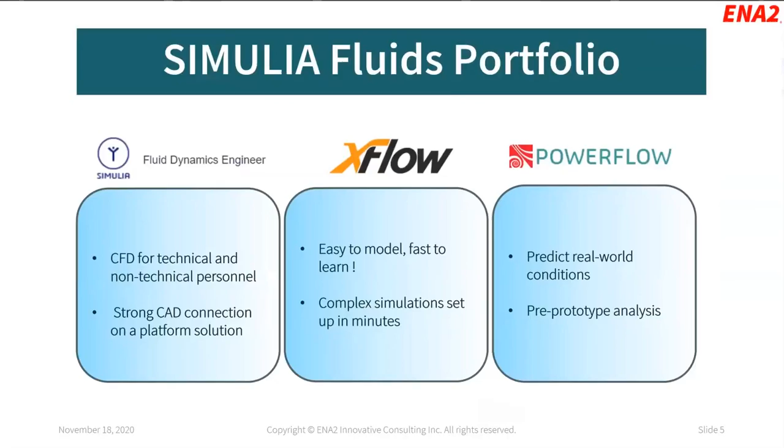All right, so let's start with FMK. FMK is a very easy-to-use solution available on the platform, and it has the mentioned CAD embedded CFD. So if you do make any changes in the CAD, it automatically gets transferred downstream of the process in your simulation study setup as well.

This reduces the amount of errors that, say for example, a non-expert could potentially commit, and really makes it very adaptable for designers, letting them perform simulations easily, effectively, and efficiently.

In support of the fact that we use a platform, it lets you quickly iterate through designs, something in the order of 1,000. So it really helps you figure out a very good starting point for your product design, and it supports the early stage design development process.

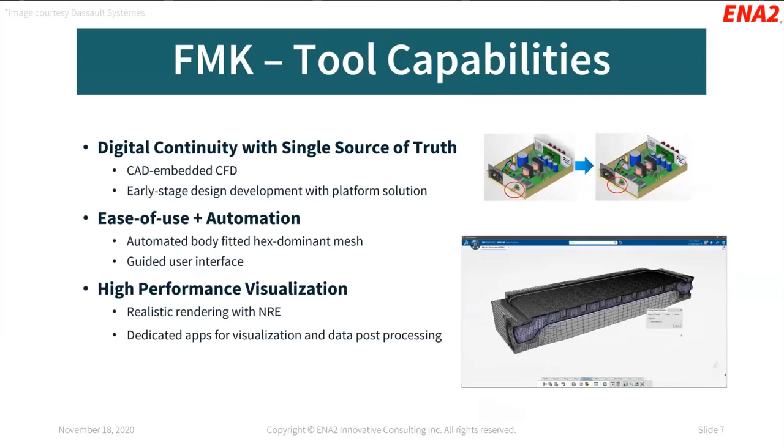It's definitely very easy to use, and it's highly automated in the way the solver and the solution are structured. We have automated body-fitted hex-dominant meshes available, and a guided user interface that helps a non-expert prepare the simulation the right way, giving them warnings and errors to make sure the simulation is prepared correctly even before submitting or running it. This gives confidence when presenting results to experts or upper management in the product design process.

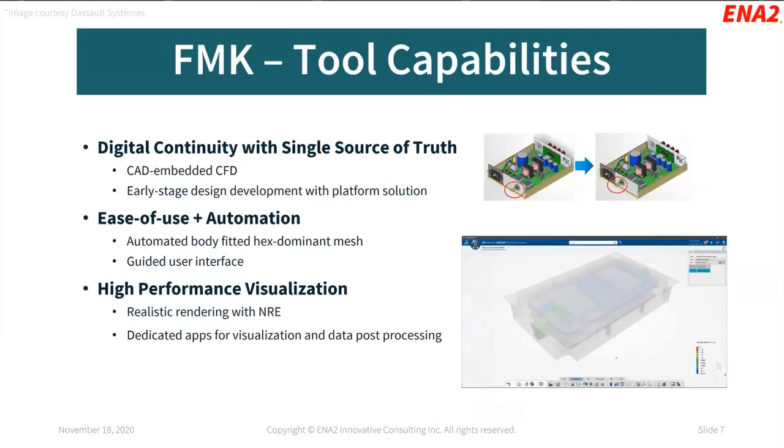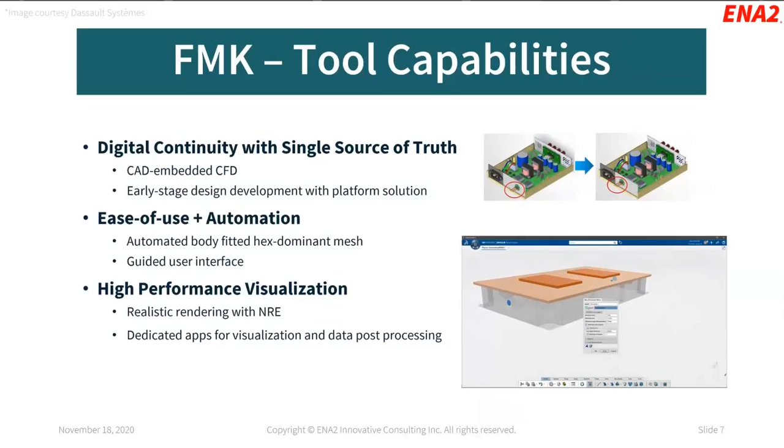It's also got some really new features added, which is high performance visualization. We now have realistic rendering capabilities available in FMK as a result of the NRE, our new rendering engine. FMK is a solution that gives you access to not just one application but multiple applications used for visualization and data post-processing — 2D and 3D streamlines, vector plots, contour plots, and things like that can be very quickly prepared and presented to upper management.

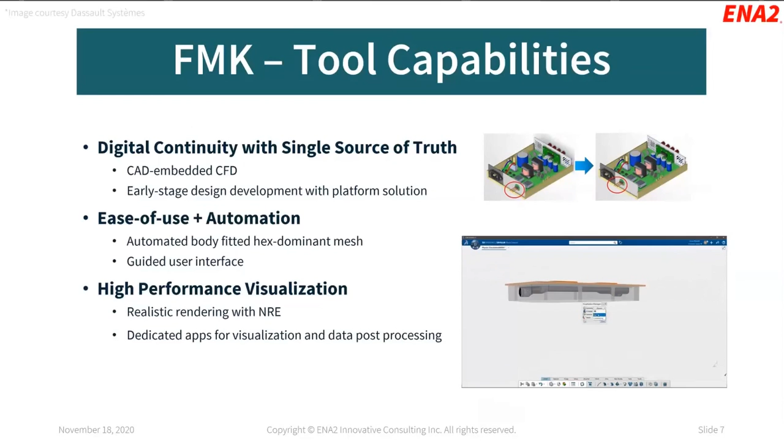As an ending note, you can see that really awesome video where FMK is being implemented in the design of, I believe, a component that goes into the high-tech industry, showing how he changes his mesh, evaluates his results, and really makes good use of the tool.

Moving on to the solver capabilities, FMK is definitely a competitive solver compared to the solvers available in the market. We have turbulence modeling that's quite standard and effective, including our very well-known eddy viscosity-based turbulence models, and our hybrid wall function approach that lets you prepare meshes that are computationally more efficient.

FMK is definitely very strong in addressing multi-physics simulation, which is really picking up in the market today. We have FSI, fluid structure interaction, where a cool feature is that it automatically detects the interfaces between solids and fluids, so the user doesn't have to go through any particular connection or conformal mapping process. We also have CHT, conjugate heat transfer models with supported radiation, which is also in demand in the market today.

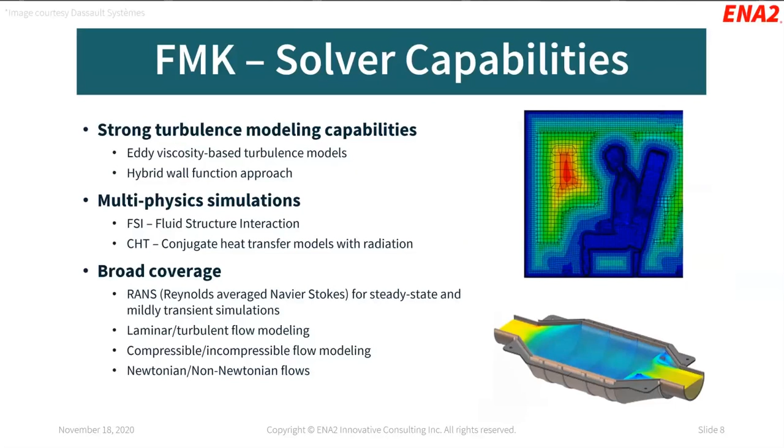As far as physics coverage is concerned, we have our very well-established RANS, Reynolds Averaged Navier-Stokes solver, that FMK uses predominantly for steady state and mildly transient simulations. Its coverage is pretty standard for any CFD tool in the market — laminar and turbulent flow modeling, compressible and incompressible flow modeling. But I think a winning point for FMK is its capability of modeling non-Newtonian flows, which is rather difficult and has strong application in the medical devices industry.

We have a lot of applications for FMK across 12 industries in total, but I've taken the liberty of putting up some applications for 3 of them. We'll start with the automotive industry, transportation and mobility basically.

Here, the kind of simulations where FMK is very useful focus on getting quick simulation results without compromising on accuracy, so we don't want to spend a lot of time preparing the geometry or mesh. Typical scenarios include equipment that goes into automotive systems, like air induction or cold flow intake systems, where you're trying to understand the performance of the component — pressure distribution, velocity distribution, and maybe thermal distribution. The same holds for exhaust manifolds and muffler systems.

Since FMK can work with non-Newtonian fluids, it has a strong application in the life sciences industry, where blood flow modeling can be done for organs and medical devices.

Lastly, looking into the high-tech industry, because it's multi-physics in nature, we can address some really cool applications like electronic cooling — for example, if you're interested in understanding a specific device's thermal or flow performance in an electronic equipment.

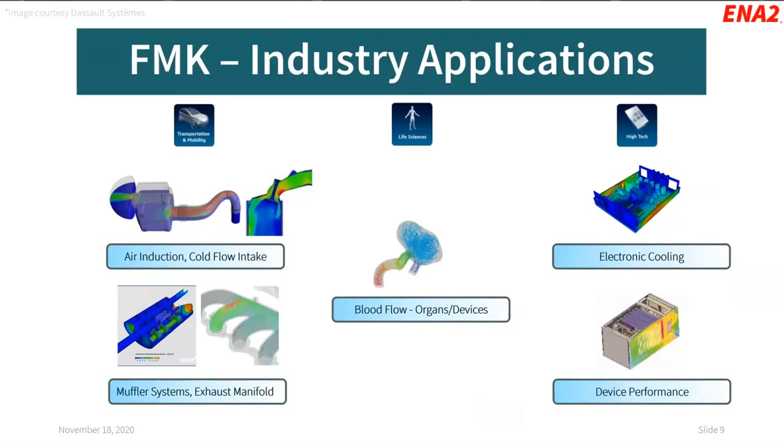Okay, so we're going to go into the next solution, which is XFlow. XFlow is a very new and unique solution that we have available in the market.

It's based on a lattice-Boltzmann methodology, and it really helps in modeling simulations which are basically large eddy simulations, which is a little different than the traditional CFD models we have available in the market right now.

However, the true advantage we have with XFlow is that large eddy simulations have been made affordable. If you look back several years, LES was a concept available in the market, but there wasn't the machine power to run these types of simulations. We do have that power available now, and XFlow is one of the solutions that helps in addressing it.

Because it works on a lattice-Boltzmann methodology - I don't know how many of you are aware of how that works - but it's essentially particle-based. So we're not really looking at the simulation results from a macroscopic standpoint; we are truly modeling from a mesoscopic standpoint.

Since the underlying solver primarily works on particles, we have an increase in fidelity compared to, for example, the RANS solver in the market. So when there's a need for performing simulations where fidelity is of utmost importance, you can definitely use XFlow for it.

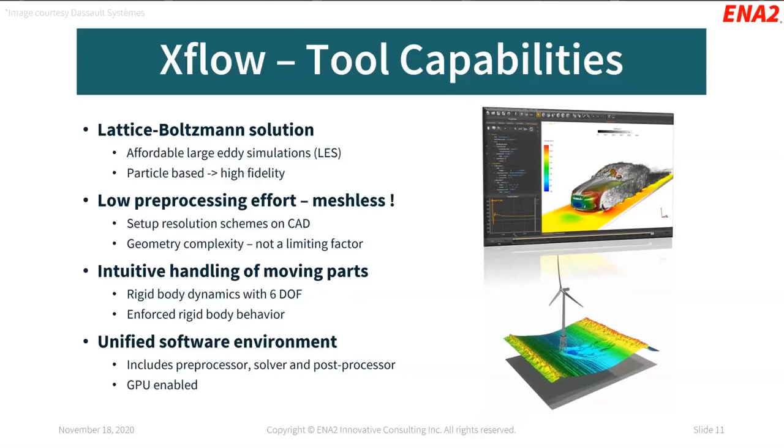Looking into the solver capabilities, we have adaptive refinement algorithms. Basically, we set up an initial resolution scheme, but you can also define criteria to carry out local refinement, which is automatically done by XFlow as the simulation proceeds in time. We have certain criteria that can help us in understanding and defining a wake in XFlow, and then you can correspondingly provide a resolution scheme for it.

If you are dealing with something like a free surface, or a multi-phase application, you can set up your criteria for detecting the surface that separates the two phases, and XFlow will automatically resolve the interface very well. As the simulation keeps explicitly moving in time, it's a time marching kind of simulation, and it will track the interface very well.

We have a single consistent wall model used in XFlow for capturing the near wall behavior, and it basically uses a universal law of the wall. It's a well-known methodology used in XFlow, and it's also used in other solvers in the market, because as we keep going closer and closer to the wall or to a surface representing a solid, we have to keep refining the meshes. But XFlow makes it so that you don't really need to refine the mesh way too much, which would make it computationally expensive, and that's how the wall model fits in.

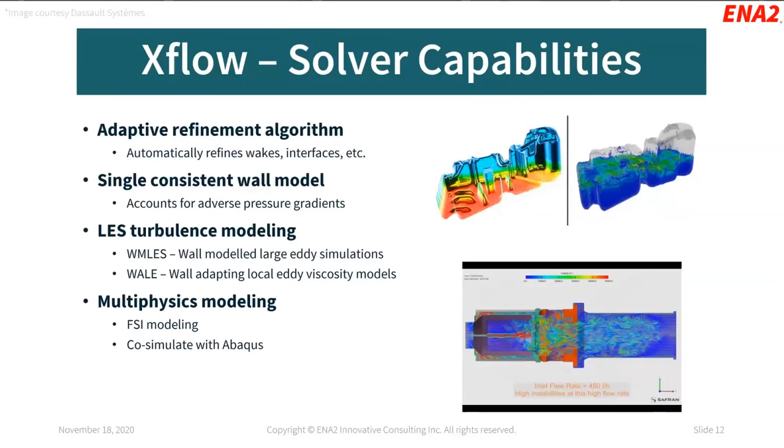When it comes to industrial applications, we have a strong footprint in the marine and offshore industry. We have wave loading that can be very well captured on offshore platforms with XFlow, which can help you in understanding the structural stability of those platforms. We have ship hull hydrodynamics, which can help in understanding drag force development, and hence help you understand ways to minimize the propulsion requirement for the ship hulls and save on fuel consumption.

If you look at the transportation and mobility industry, it definitely can be used for aerodynamic and aeroacoustic applications, which is standard. But when it comes to lubrication, there are not many solvers available in the market that can do it very effectively and with ease. Lubrication is a very unique scenario if you want to do a test because it's extremely expensive.

Because if you want to look, for example, at the gear house that comprises the gears you want to test the lubrication performance on, it has to be made transparent, which is extremely cost ineffective, and that's even before considering the costs of running a test study. So having an alternative solution that can capture something like lubrication with a very high level of accuracy is important, and XFlow does a very good job of it.

And lastly, in the energies, processes, and utilities industry, we have hydropower modeling. You can extend this to consider generation of power from Archimedes screws or water wheels, in addition to what you see in this line. And you can also do wind turbine modeling, which we touched upon.

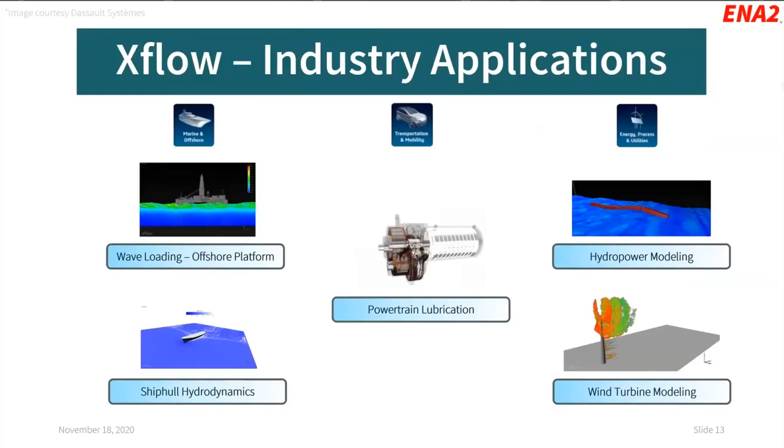Last but not least, I'm going to talk about Powerflow, which is the most recent solution added into Simulia's fluids portfolio. It's again a lattice-Boltzmann solver, but the key difference between XFlow and Powerflow is that Powerflow has been extremely validated in the industry. It's been used for more than 25 years, so it's not a new solver, and automotive industries greatly appreciate the level of fidelity that a lattice-Boltzmann solver like Powerflow can provide. It was primarily used for ground transportation applications.

We are seeing new applications developing with the use of this tool. It definitely addresses aerodynamics, aeroacoustics, thermal engineering, and water management types of simulations.

When it comes to geometry preparation, every CFD engineer has to go through a painful process of preparing the mesh. But Powerflow addresses this by making geometry preparation very easy and effective. You organize your geometries in a way that really saves a lot of time in the downstream setup of your simulation. Surface cleanup at the CAD level or mesh level is very well handled. We only do surface tessellation, or surface meshing, which can be done with just a couple of clicks of the mouse. We also have wrapping tools available, which help shorten the amount of time the user invests in mesh preparation.

And if you want to make a small change in the geometry to see the benefit from the simulation, we have mesh morphing capabilities available within the suite of products, so you can quickly change your design at the mesh level and just run the simulations to see the kind of benefit you're actually getting.

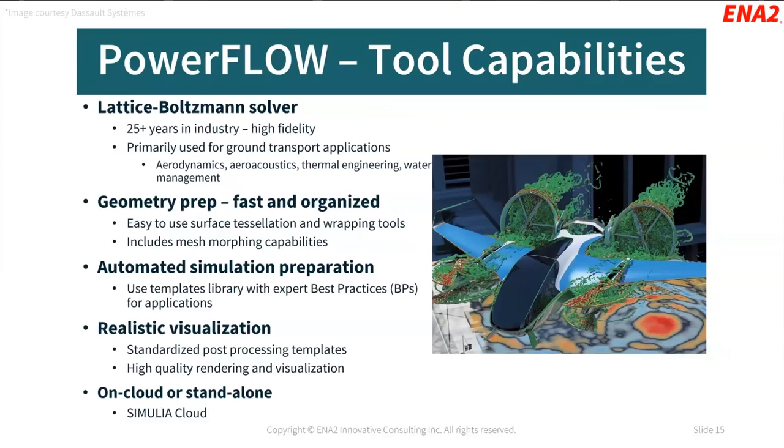The technical capabilities of Powerflow include very good turbulence modeling schematics. It very well predicts transient separation, because the confidence in the tool is to basically be competitive enough to a testing scenario. It has automatic domain discretization, so the user doesn't spend too much time on meshing, and we have rotating and moving geometries very easily supported in Powerflow. I'm not sure if you got a glimpse of that—it was in the animation at the bottom right. And it's been incorporated for threaded tire modeling.

Inlet turbulence modeling is a differentiator than other tools we have in the market, which can bring it a step closer to fidelity and really help in modeling real-world scenarios. Velocity freeze is very good with Powerflow, making the simulation more computationally efficient. You'd find that certain disturbances within a CFD simulation don't really evolve in time, no matter how long your simulation duration is. So Powerflow automatically detects these regions, freezes the velocity, and uses computational resources when things are rapidly developing, where you need to predict certain separations and features with a higher level of accuracy in a shorter amount of time.

Acoustics modeling is very good in Powerflow, so we can actually understand the noise generated from flow. Literally, you can virtually capture the noise as if you were sitting in a car trying to understand what the noise would be when you start the car's HVAC system. That's a generated MP3 file, and you can get a clear difference of what the observer is going to hear. And lastly, looking at flow-induced noise detection, acoustic simulations are very challenging to perform, not just to run them, but to also figure out what has actually caused the noise.

We have a patented application available in Powerflow that can rank sources based on certain geometries or geometry features, helping you structure your optimization process with ease. Thermal modeling is also supported in Powerflow, where you can do battery thermal modeling. And if you want to look into human comfort and understand the effect on a human in a closed space, like in a car, we have human comfort models available, like the very famous Berkeley human comfort model.

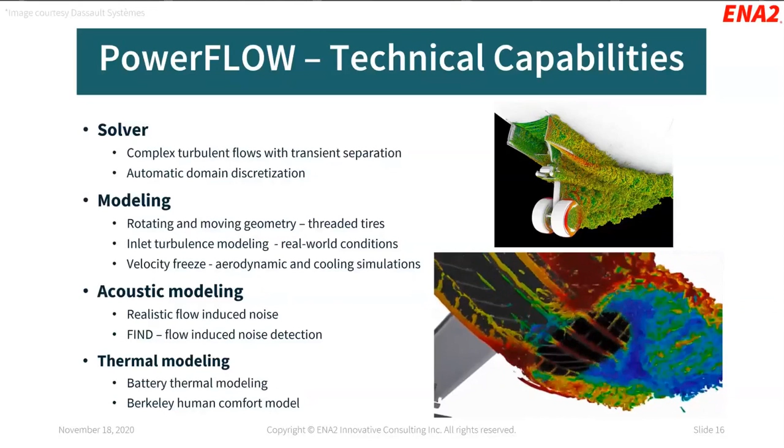Lastly, looking at industrial applications, we have car and truck aerodynamics, where people don't even really rely on physical prototyping and testing anymore. They are very confident in the results we get from simulations. We have HVAC noise that can be captured with Powerflow in the automotive industry. Equipment noise, where predominantly the noise comes from the inlet or outlet portions, or from any fan running within the system for cooling applications, typical for industrial equipment systems, can be very well estimated. You can understand the radiated power, and get the near field and far field acoustics.

And for aerospace and defense, Powerflow has been significantly used to predict the drag and lift performance when it comes to an aircraft. And if you do have jet noise modeling involved, where you want to look at the noise that's actually going to be generated from, say, the jet engines, you have a chance of doing that very well in Powerflow.

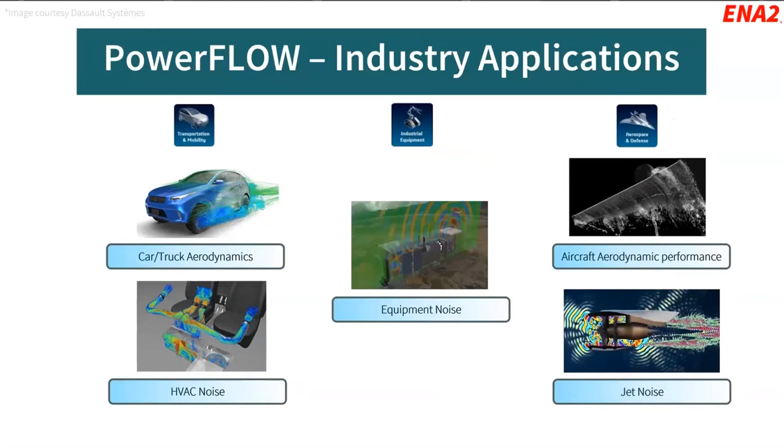Summarizing what we went through today, for the key takeaways: we have FDE that we talked about. The winning features are that it's CAD embedded, and it's very easy for a non-technical expert to use. We have automation involved in the meshing and fluid extraction process, and we have the RANS code, which is basically industry competitive.

When it comes to XFlow, it's meshless, so it's a very good simulation software to look into when you really want to save on simulation time and model challenging simulations. It works on the lattice Boltzmann solver, the LBM solver we talked about. It's excellent for modeling moving bodies, multi-phase, and free-surface simulations. Fidelity is guaranteed with XFlow because of the LBM solver, and it's inherently transient.

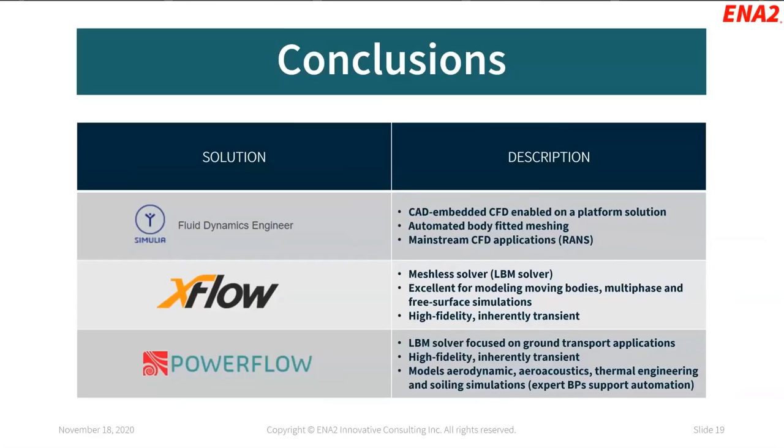Finally, for Powerflow, it's a solver focused on ground transportation applications. A couple of things we talked about before, like aeroacoustics, thermal engineering, soiling simulations, and we have best practices that can help you model it the right way. We have high fidelity and inherently transient types of modeling schemes. On that note, I'd like to conclude the presentation and open the floor for any questions.

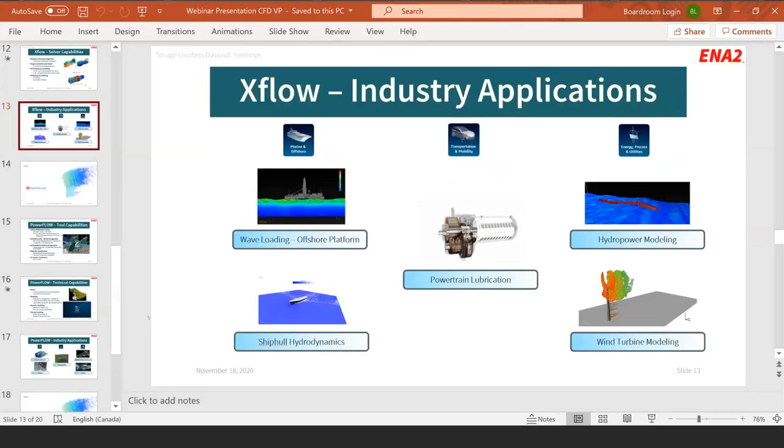My second question, and perhaps the last one, is on slide 12, just before this - also on the XFlow solver. You mentioned that in this solver you have a single consistent wall model to tackle adverse pressure gradients. I'd like to know a little more how you tackle adverse pressure gradients, because from my understanding this is a quite tricky problem, and I myself have dealt with that during my PhD. So I thought if we have something comparable with some sort of validations already for this solver, and it's validated, it would be good news for industrial use. Could you explain to me or show me a little more on that?

Yeah, I can definitely share more information in terms of how it's validated in the industry. To add more to the wall model - it's a little bit... I mean, to be honest, I don't have all the information on the exact schematics of how the wall modeling is done in XFlow.

It's a little bit modified than traditional wall models we have available, but I can definitely share more validation studies so you can understand the accuracy and effectiveness of the wall modeling scheme. Actually this is quite interesting, because I have compared direct numerical simulation using Navier-Stokes solver with lattice Boltzmann, using Powerflow.